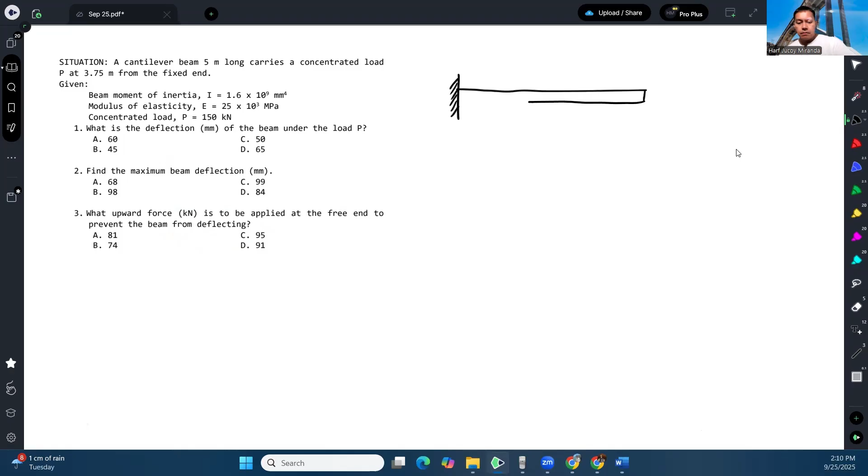Okay, then there's a P applied but not necessarily at the free end. So the length here is different from the length of the beam, meaning it is only located at a certain distance. So what I'll do here first is derive the general formula.

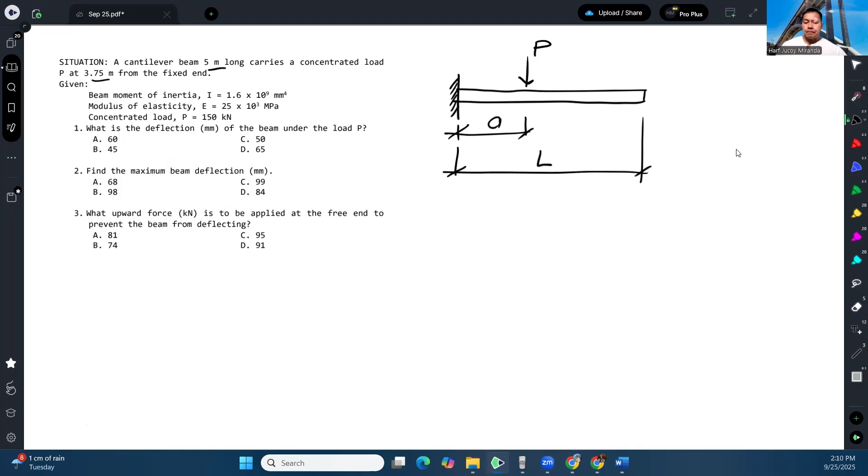Maybe you can use that later. So let's say this has length L, and P is located at a distance A from the fixed support. Let's call this point A, and for reference, point B, then point C.

For reference. Okay, and then, of course, to get the deflection, we choose whichever method we want to use — double integration method, area moment method, or conjugate beam method.

So anyway, for this scenario, to differ from what I usually do, which is the double integration method, let me do the conjugate beam method instead.

And then I will do this — since we know there's a reaction at A, and also a moment reaction at A — so to avoid including that in the computation, let me just draw the moment diagram instead.

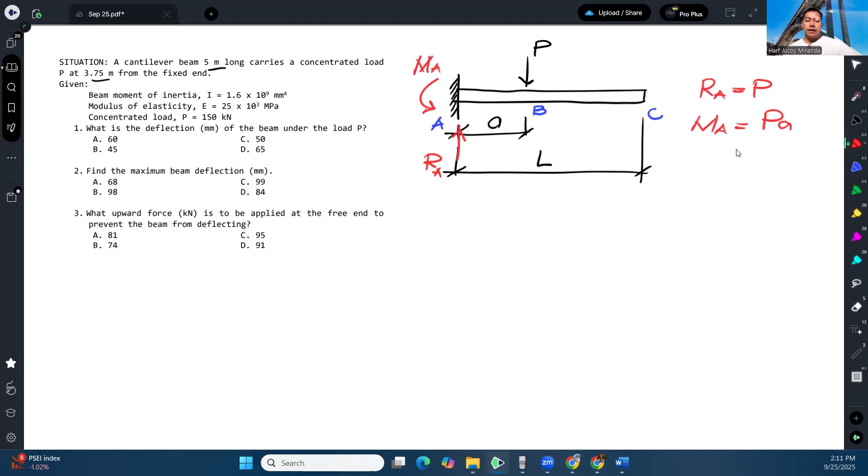Then I'll do the conjugate beam. Well, anyway, it's easy enough to get that the reaction at A will just equal P when you take the summation of forces. Then the moment at A will just be P times A.

Okay, so that's why when we draw the moment diagram now, it looks like this, where the value of this is P times A. Okay? So that's going to be our bending moment diagram.

Now, using the concept of conjugate beam, let me draw the conjugate beam equivalent to this. Of course, the conjugate beam is just a beam whose loading condition is based on the moment diagram. So the loading there is like this, with a magnitude of PA, since this is A.

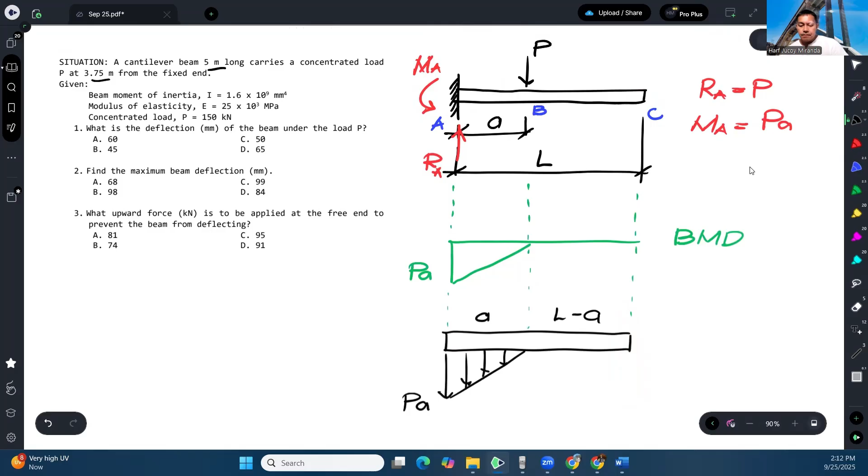This part is L minus A. Okay, then according to the rule of conjugate beams: when the original beam is fixed, it becomes a free end in the conjugate beam. When it's a free end in the real or original beam, it becomes fixed in the conjugate beam. So this becomes fixed. Okay, so this is now our conjugate beam.

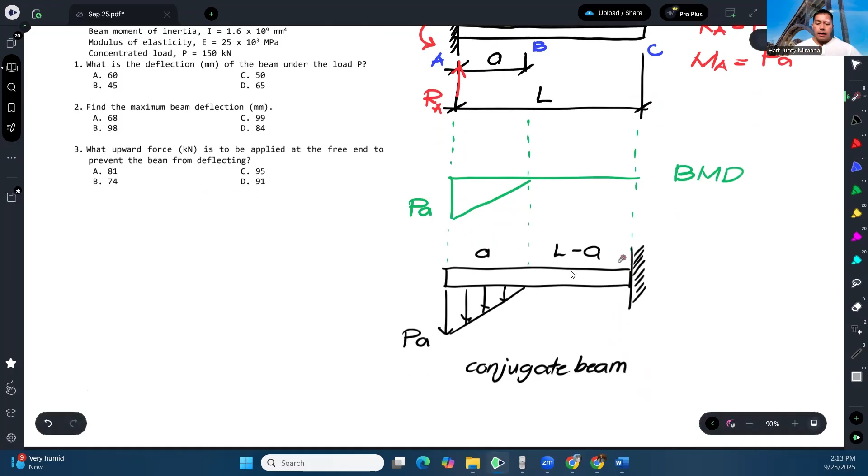Again, in the conjugate beam, the shear represents the slope in the real beam, while the moment in the conjugate beam represents the deflection in the original beam.

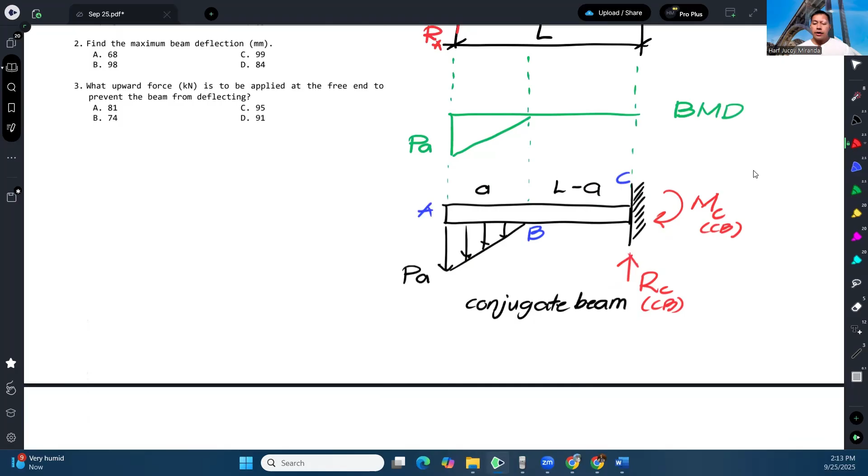Okay, the conjugate beam is our basis here. So if you take the summation of forces in Y in the conjugate beam, assuming upward is positive, we have the reaction at C in the conjugate beam, upward, minus the area, which is 1/2 times PA times A, equals 0. Therefore, the reaction in the conjugate beam equals PA squared over 2.

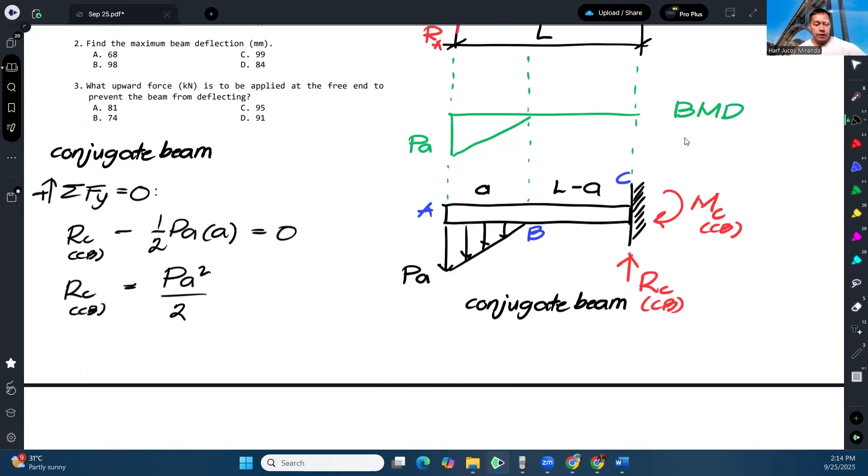Okay, and if you want the moment reaction at the conjugate beam, take the summation of moment at C, assuming counterclockwise positive. So we have PA squared over 2 times the moment arm, which is the distance from here to here — this distance, which is L minus A, plus 2/3 of A, since that's the centroid of the triangular area.

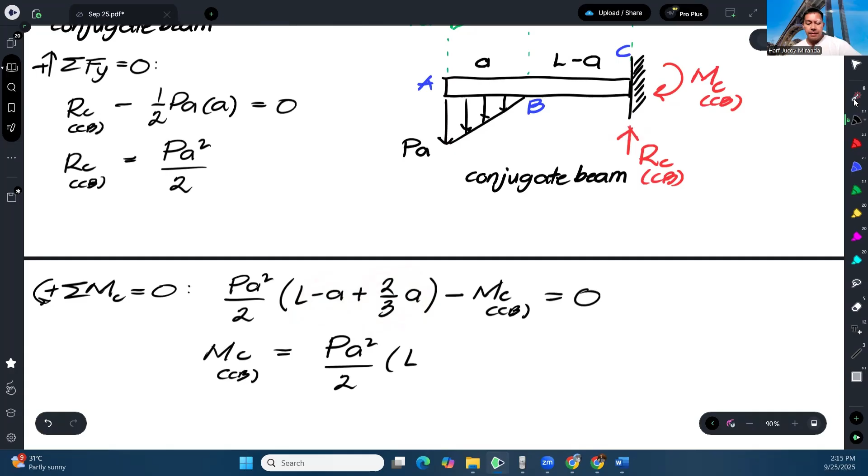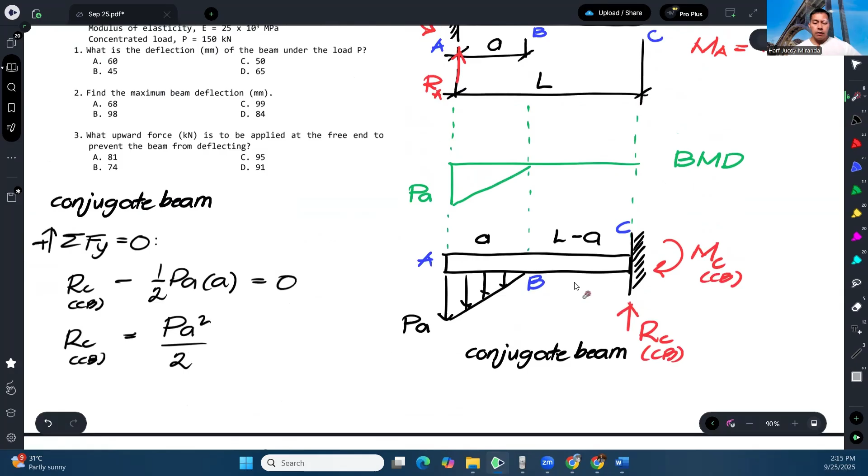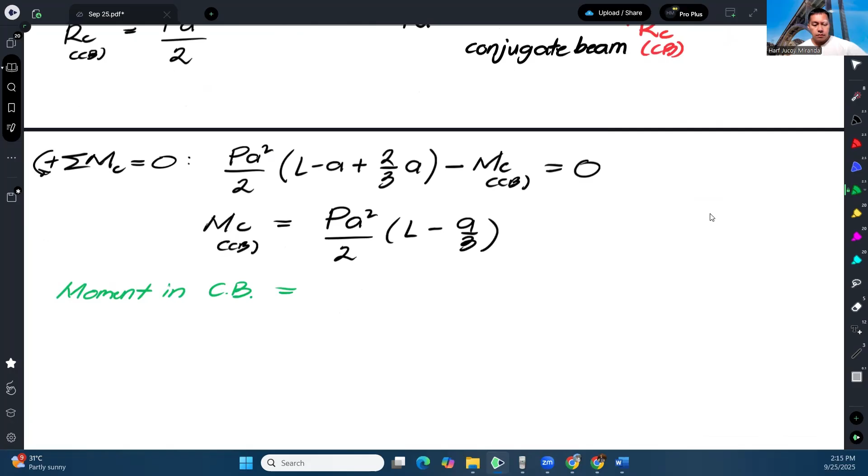So what we know is that this moment in the conjugate beam represents the deflection in the real beam. So this moment, which is the moment at C, the moment at C of the conjugate beam will represent the deflection at C of the real beam. So therefore, the deflection at C is equal to PA squared over 2, times L minus A over 3.

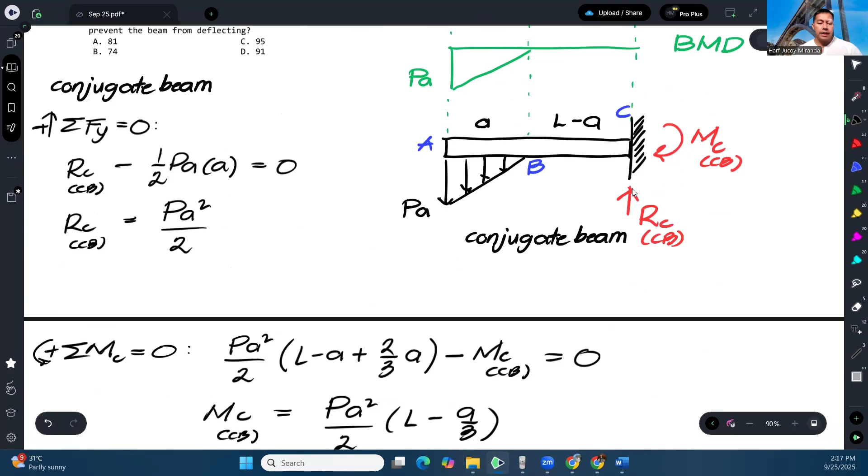So let's convert 150 to Newtons, and A to millimeters. So that's 3,750 squared over 2EI. The given E is 25 times 10 to the 3, and I is 1.6 times 10 to the 9. And then we have L, which is 5,000, minus 3,750 over 3.

So that's going to be our maximum deflection. This is in Newtons, this is in mm squared, this is in Newton per mm squared, this is in mm to the fourth, and this is in mm. So now the Newtons cancel, this becomes squared, and this cancels out, leaving us with this unit, which will be our maximum deflection.

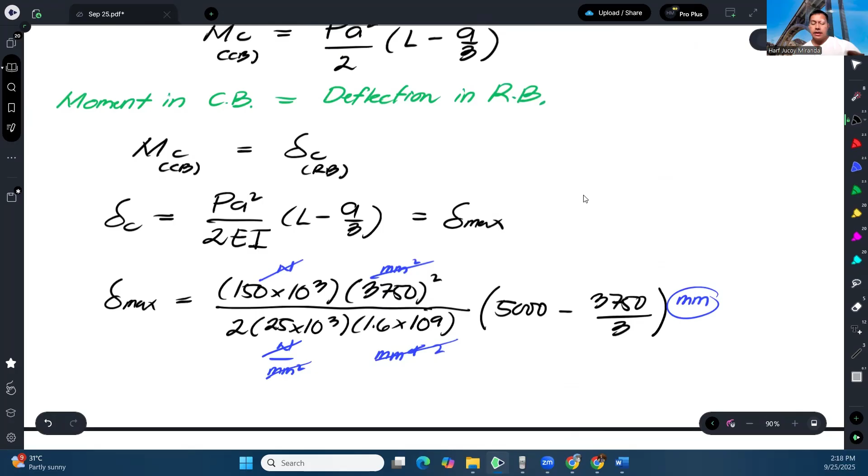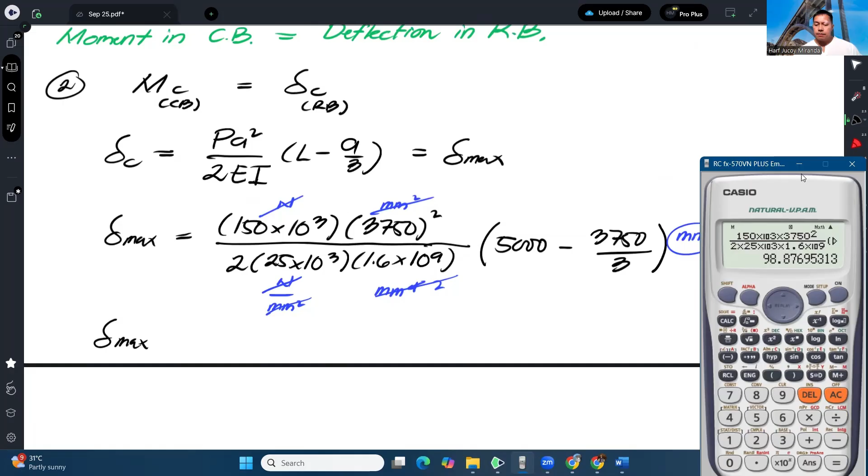So this is for number 2. We have 150,000 times 3,750 squared, over 2 times 25,000 times 1.6 times 10 to the 9, times 5,000 minus 3,750 over 3. And that gives us 98.88 millimeters, which is our answer for number 2.

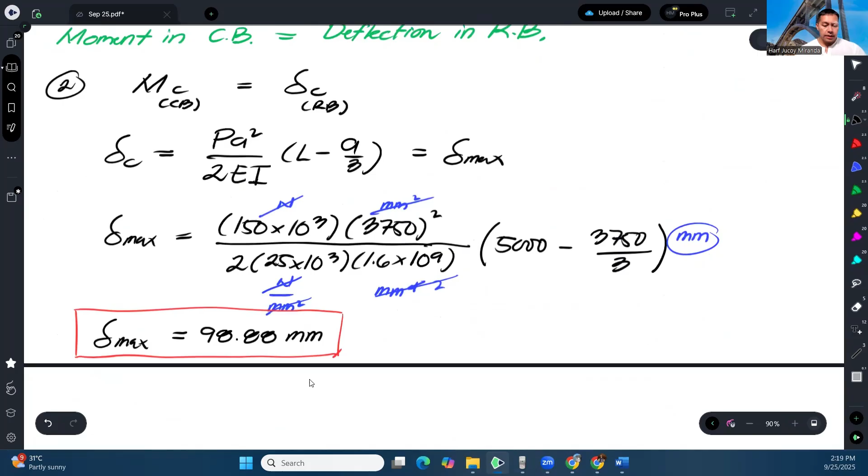So for number 2, if you round that off, it's approximately 99. So the answer is letter C.

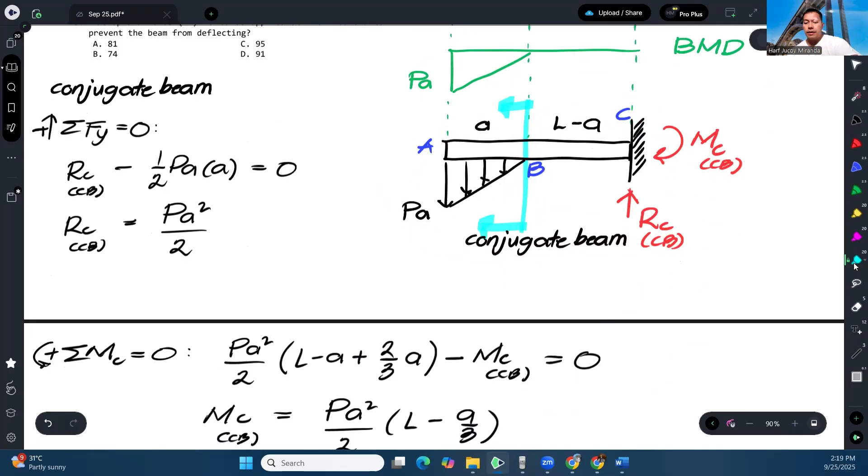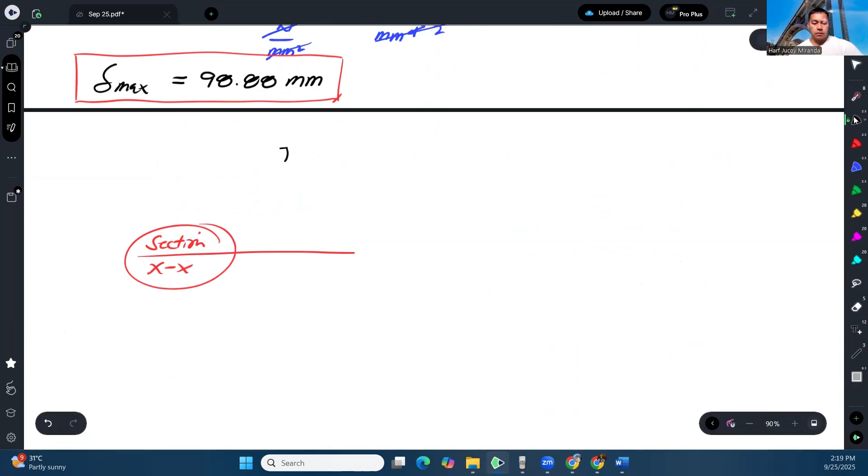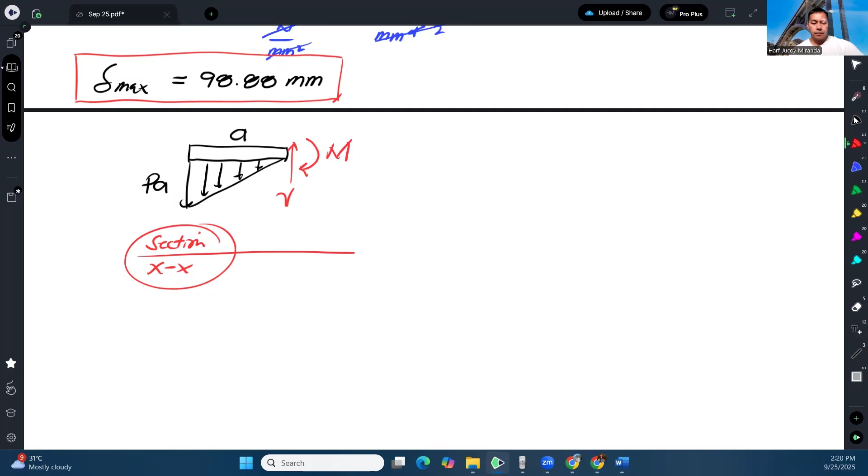So from section XX, this is A, this is PA, and here we'll have a shear, and of course also a moment, the moment at point B. This point B is what I previously called point A — to be specific, this is point B of the conjugate beam.

So let me repeat: this moment will represent the deflection here, while this shear will represent the slope in the real beam. So let's get the moment here.

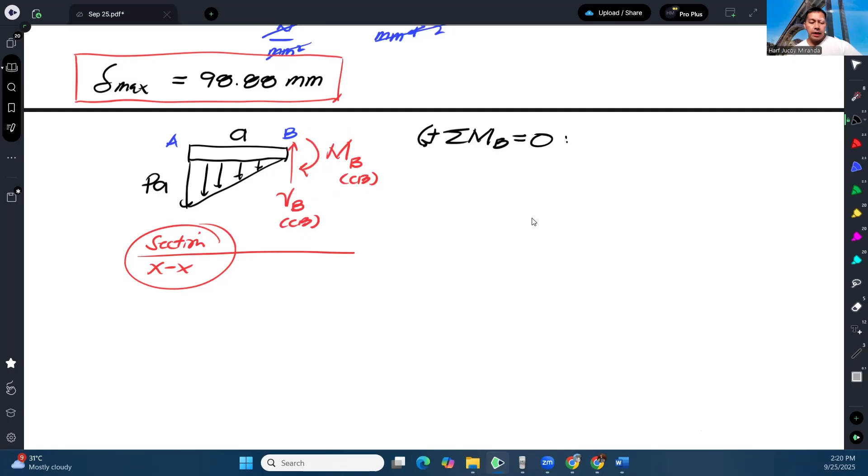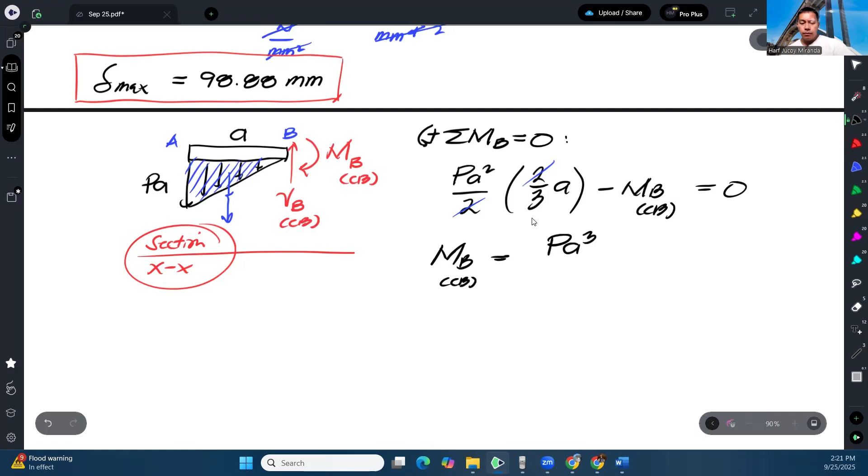So if we take the summation of moment at B equal to 0, assuming counterclockwise positive, we have PA squared over 2, which is the area, times a moment arm of 2/3 A, counterclockwise, minus the moment at B of the conjugate beam. Therefore, the moment at B of the conjugate beam is simply PA cubed over 3. This tells us that the deflection at B of the real beam is equal to PA cubed over 3EI.

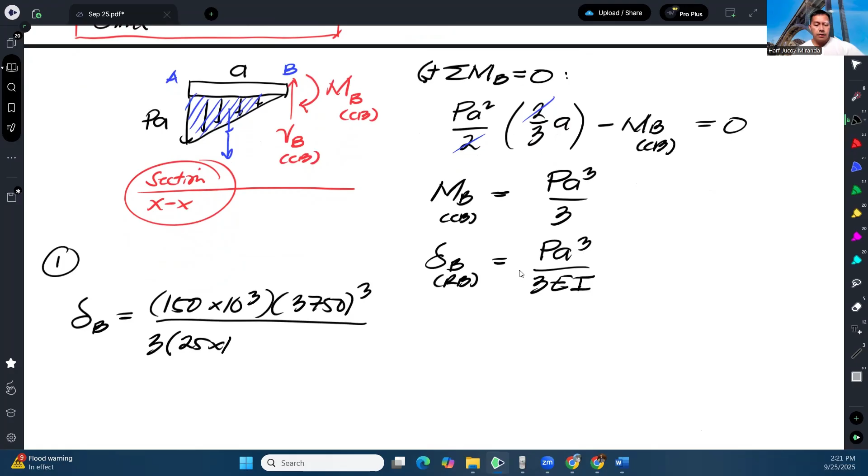Because it should equal the deflection, that's it. So therefore, for number 1, the deflection under B is equal to 150 kilonewtons, A was 3,750, cubed, over 3EI. And that should give us the deflection at B.

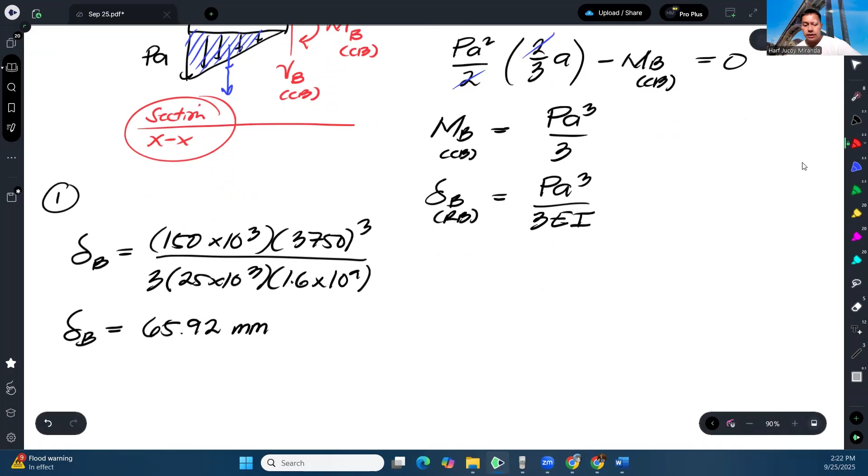So, no problem with the units. That will give us... over 3. Okay, so that gives us 65.92 millimeters. Hence, that will be our answer for number 1. And the nearest answer is letter D.

Lastly, what upward force is to be applied at the free end to prevent the beam from deflecting? So here, we will use superposition. What should the reaction be so that it doesn't deflect? It's like a prop - what's the reaction at that prop beam? But to determine that, I'll just apply superposition.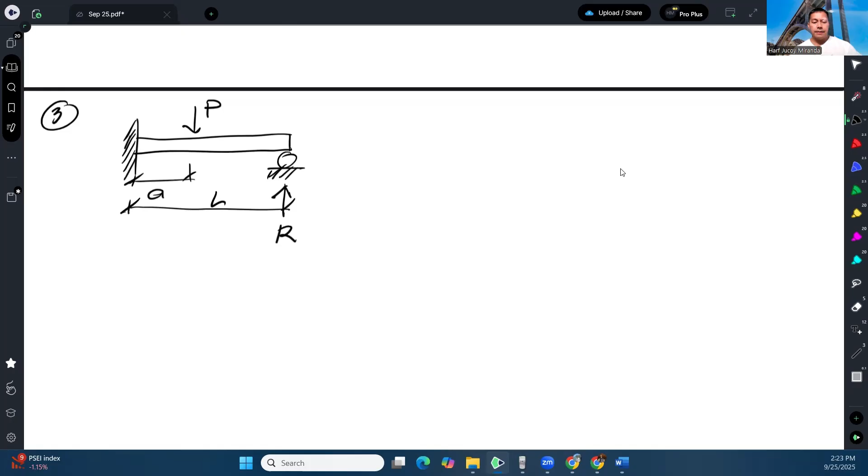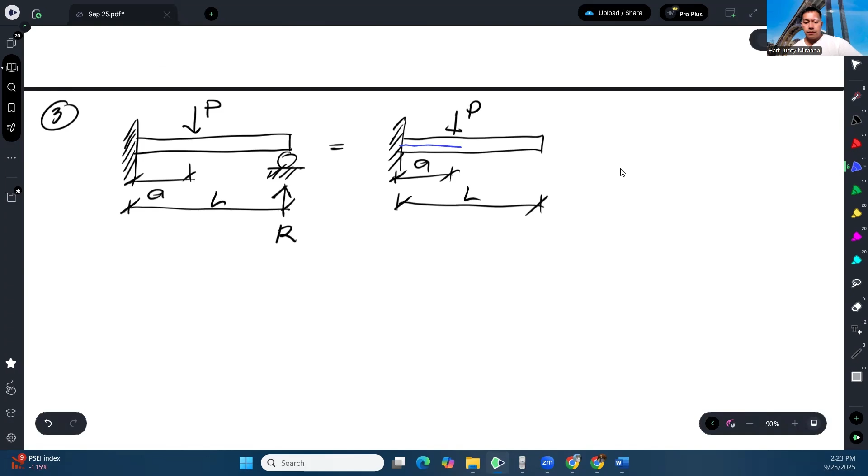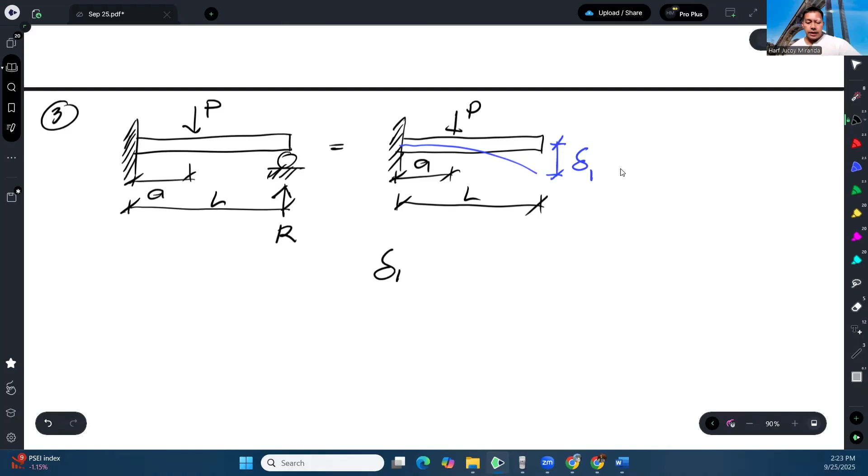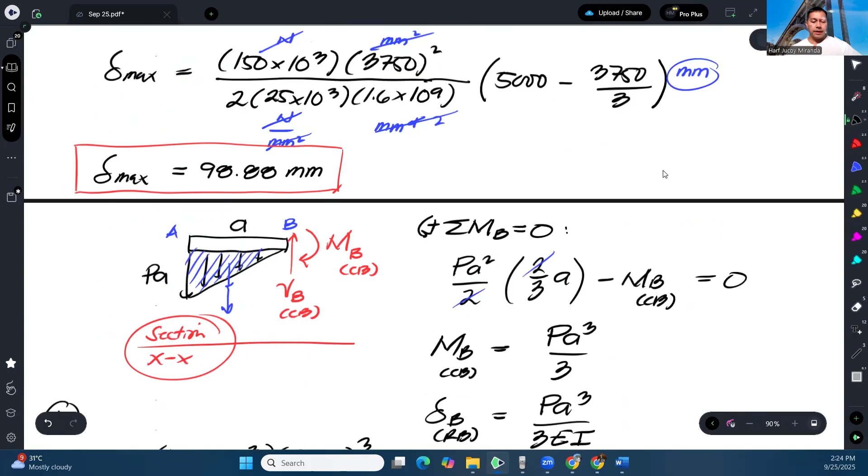So far, we know that the deflection at the free end, when we remove the prop, the deflection here, let's call it delta 1, is calculated as this derived formula: PA squared over 2EI times L minus A over 3. That's PA squared over 2EI.

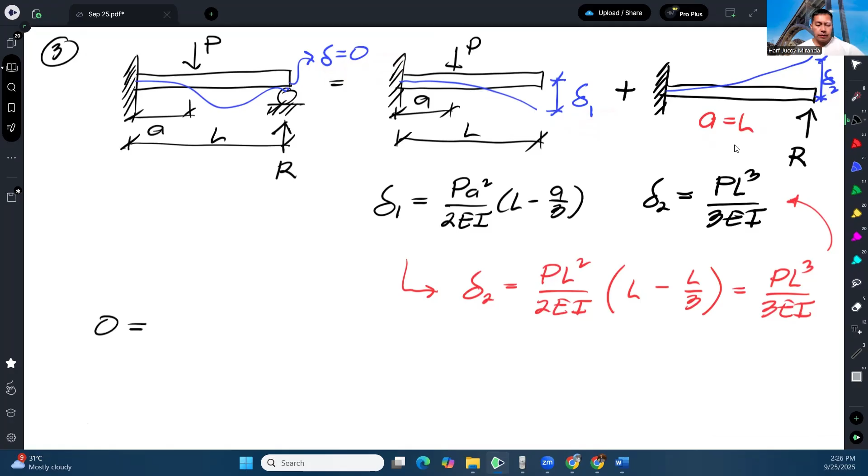So the deflection here should be 0. That means if we add delta 1 and delta 2, it should equal 0. So we have 0 equals delta 1, but it's downward so it's negative, plus delta 2 which is upward. So in short, delta 2 equals delta 1, which gives us - let me just call this R, since I made R the reaction - R L cube over 3EI equals PA squared over 2EI times L minus A over 3.

This part, we don't need to compute anymore since we already have it - it's already 98.88. So we can just equate this directly to 98.88 millimeters. So let's substitute everything now: R, our L is 5,000 cubed over 3E, about 25,000, then I is 1.6 times 10 to the 9.

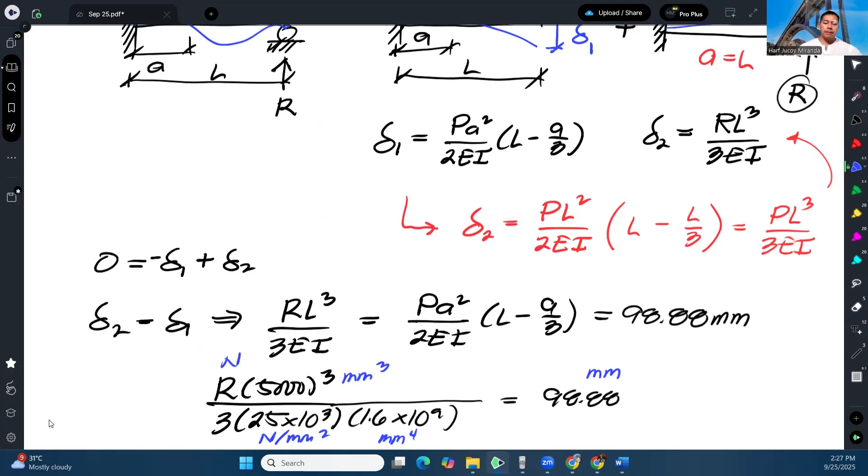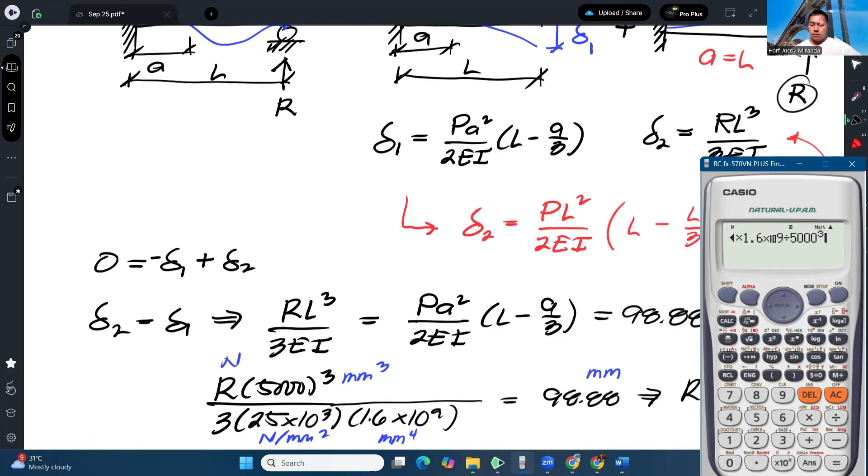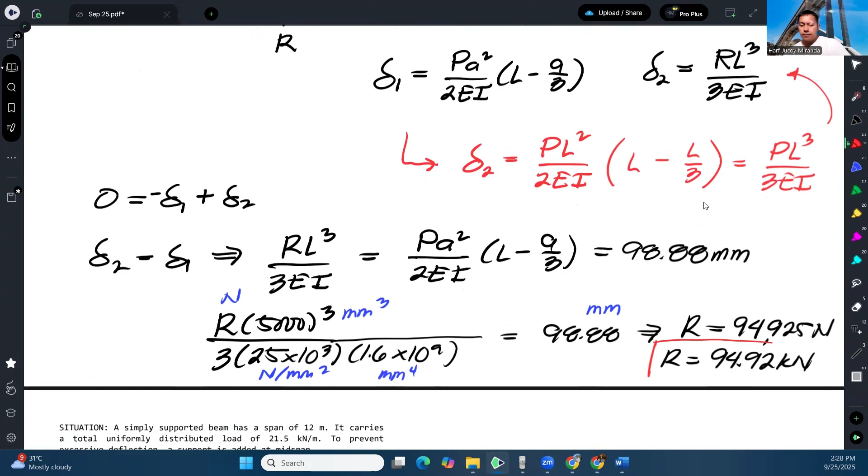So our R would be... 94,925 Newtons, or in kilonewtons, that is 94.92 kilonewtons. And that would be our answer. So therefore, the required reaction here would be around 95 kilonewtons. And that's how we solve this problem.